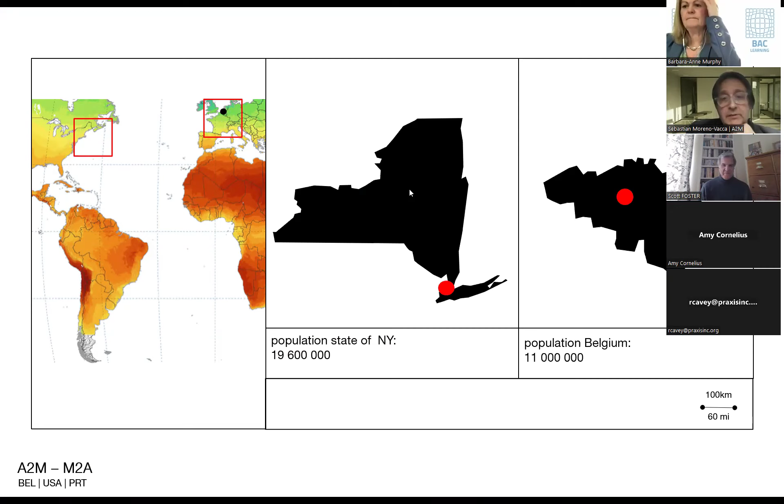We always locate where Belgium is, where I'm coming from, because it's almost like a joke as a country—it's so small. It's maybe half the size of New York State. Compared to New York City, we're like a region. Brussels is maybe a third of the size of the city of New York.

On top of that, we are very far from having nice, appealing, sexy skylines—very far. Wherever we go in the world, we see more beautiful skylines. The only thing is, when you take a picture of Brussels, wherever you go, you see that everywhere in the city, wherever you walk through, you're going to see passive house all over—in retrofit, in new builds, for all kinds of destinations and all kinds of size. That's the only thing we can say could be appealing.

And all that is because, as you heard from Barbara Ann, we adopted a law that came into effect in 2015, where passive house has been integrated into the official energy calculation methodology, and that impacts 100% of building permit demand.

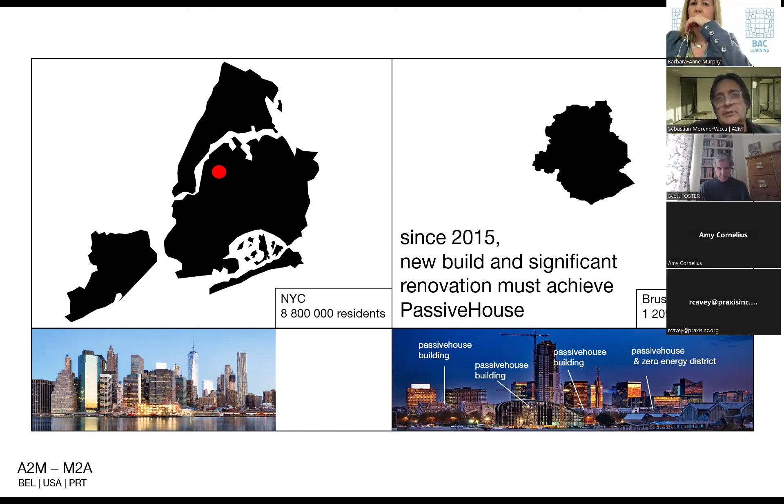It can be new build, in retrofits, all of it, 100%. So that was really a premiere. And it happens mainly when we look backward how it could be. It's mainly due to ignorance of the people who voted, hopefully. So I think this is one of the good help, the ignorance of people.

So the law was voted in actually in 2011. It was a parliament vote after 3 sessions. It's been voted, and it was voted at unanimity, 100%. And even the people in the opposition voted because their expert didn't understand really well what we were talking about.

That was fantastic. Nevertheless, after the law had been voted in 2011, 1 year after, we went to the sector together with the minister. She was a fantastic minister. She had in charge environment, etc. She was a very, very tough woman. After, we went to the real estate, to the builders association, to architects, engineers, but first she voted the law.

And what happened 1 year after the law had been voted? It was 2012, so 3 years before the law was supposed to come into effect. It was like it becomes crazy.

For a year, we had like almost panic. It was like all the sector says, 'Are you crazy?' We were in 2012. 'Are you crazy? It's going to be the bankruptcy of the region. No one is going to be ready for it.'

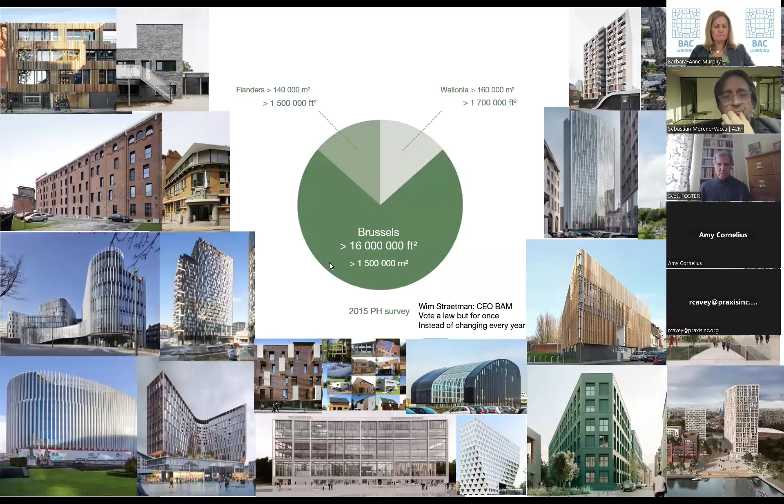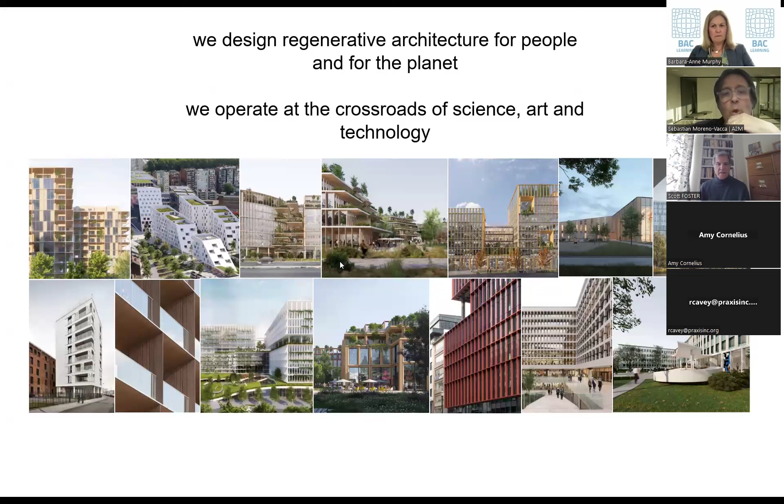So now, because the idea is to talk very briefly, where are we now in this situation? We're just architects - Barbara gave a fantastic introduction. We just do buildings, and a lot of trainings or conferences all over the world. We have 4 locations for the moment. Since we started in 2000, we did approximately 100 projects, 100% of them are passive house. You see here the sizes, some very small up to very large scale.

The question is, very quickly, passive house is now normal, it's in the code. Whatever you put on the market, new build or retrofit, there's nothing special anymore. It's just one more building.

So very quickly, we, and not only we but also our clients and developers, were asking what can we do next. A bit before the COVID crisis and the war crisis in Europe, we had a lack of wood, no more steel, aluminum or copper for 1.5 years. Before all this crisis, the idea was, can we go further?

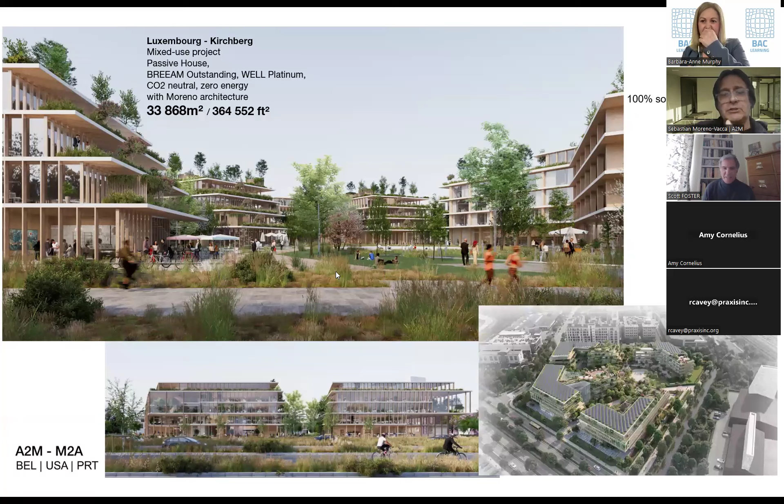Same in reuse, in circular design. Here, for example, is a building we just finished - everything was taken from recycled or reused materials, including the structure. That's a first in Europe, to use a stock of old steel from Holland. We used it to build, but you need a strong calculation methodology and so on. Again, it's retrofitting a former office building into housing - something we do now more and more.

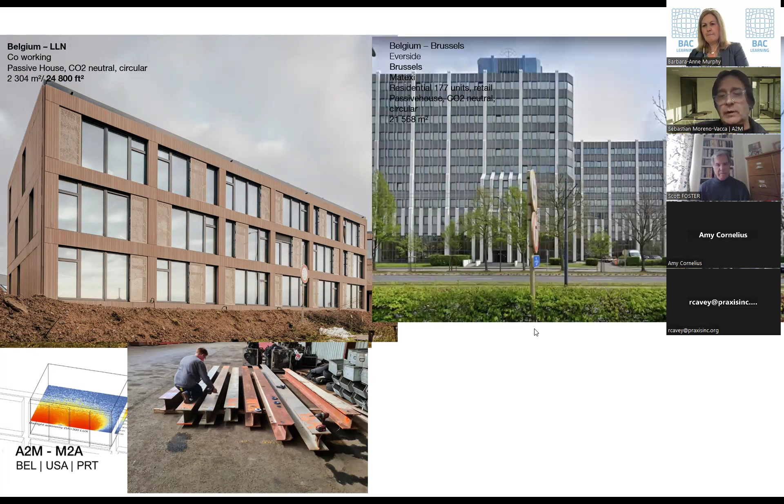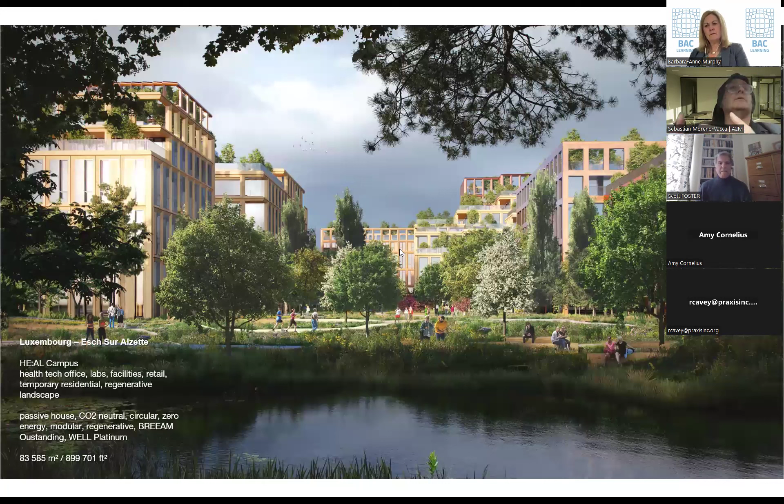So that's normal. This is another campus, in Luxembourg - a large brownfield site that's going to be about 80,000 square meters, a bit less than 1 million square feet, of office labs for startups, co-working and co-living spaces. That's the whole loop of elements we use, a continuous loop - the passive house calculator is somewhere in there, but it's a continuous loop from the very beginning. Afterward we deliver buildings using a lot of AI, parametric design, on-site control, etc.

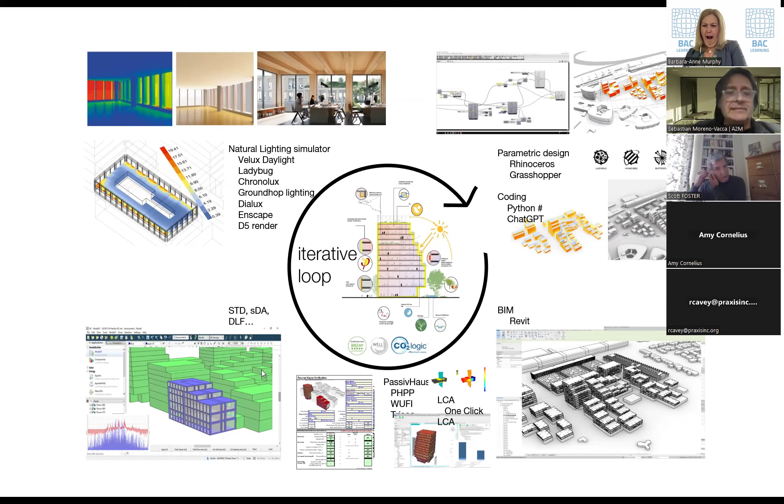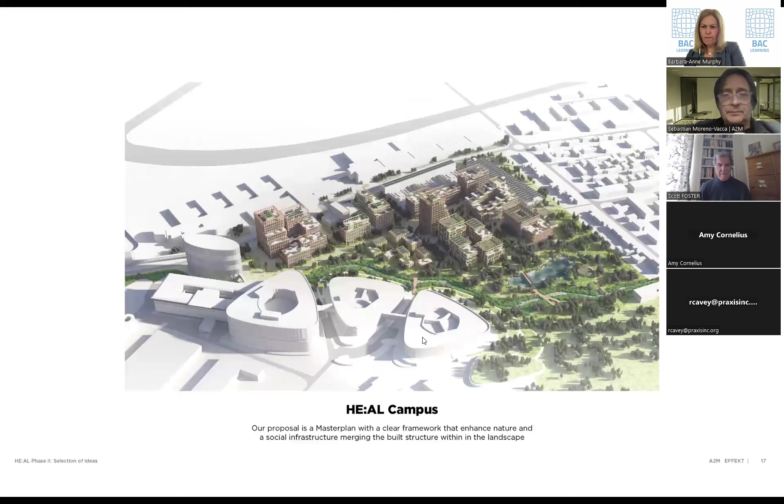That's something natural now. This is typically the narrative of this project, how it's going to be - this brownfield is going to turn into this, using parametric design. I'm going a bit faster now.

Another thing we use more and more is offsite construction. Everyone already knows this in passive house, but the idea is to go beyond - can we build to unbuild, with elements you can click and unclick, with no glue needed? Can we go that far?

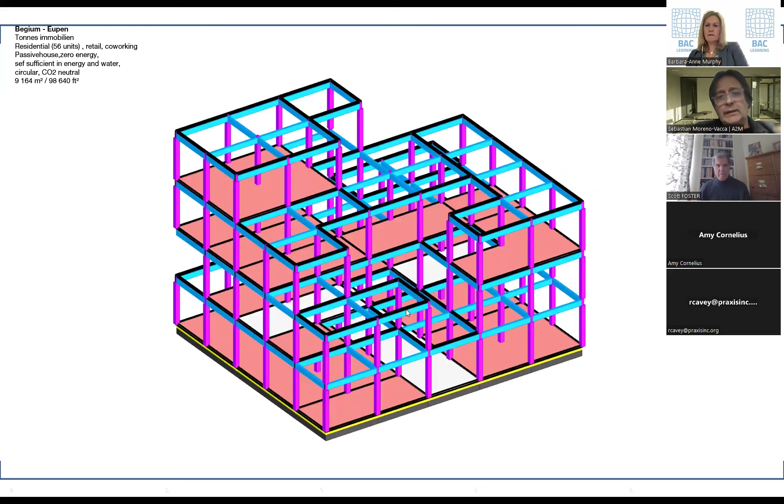So that's a project we're just starting now. The client wants the site to go beyond passive house - to be off-grid, not only in building assembly but also in energy and water. So you don't have to be connected anymore - over, ciao, finished. There's a retrofit component too, and the CO2 is going to be even negative because it's a clever system. One day I'll come back to explain it.

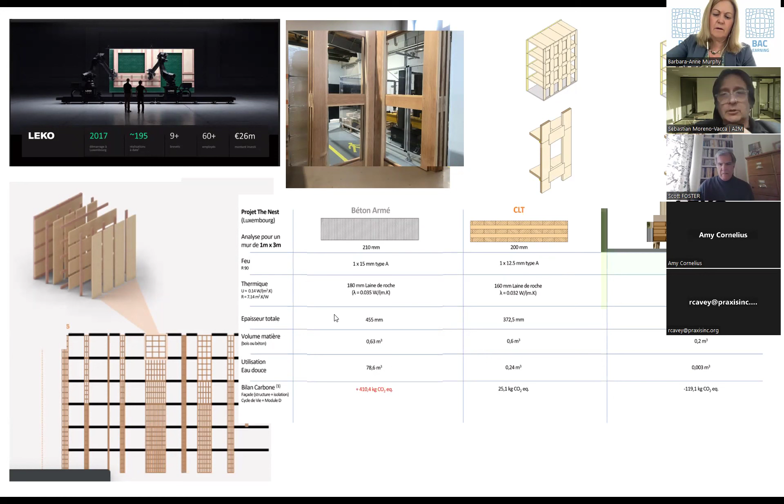So that's the large-scale retrofitting I was talking about, the one we drank so much coffee over. It's a bank, a building by SOM - Skidmore, Owings and Merrill - the famous, fantastic architecture firm. Back in the day it was led by Gordon Bunshaft from New York, built in 1964. So it's a landmark, a listed building.

So it was a competition for the ING Bank, how to retrofit it. We proposed to go beyond passive house, of course, BREEAM outstanding, platinum, etc. So it's already in construction now, in retrofitting.

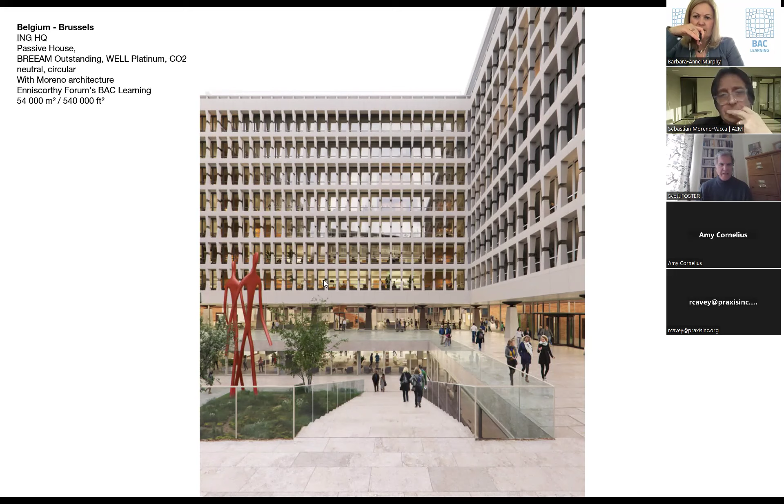So you see the same loop of all this software. It's almost over now, and of course it hits most of the goals. We have the 17 UN goals. We like to mix it with the one which is here on the bottom, which comes out of that famous

economic donut, if you remember, from Kate Raworth. She was one of the main people, she wrote a fantastic book on this, just in 2017, with the minimum social you have to fulfill and don't mortgage the boundaries. So it's kind of a rearrangement of the 17 goals.

This one is going to hit also the European taxonomy. Two of the first points are out. So when we see what are you good at, it's very easy to hit 10 to 11 goals of the 17 of the United Nations. So this is what we talk about.

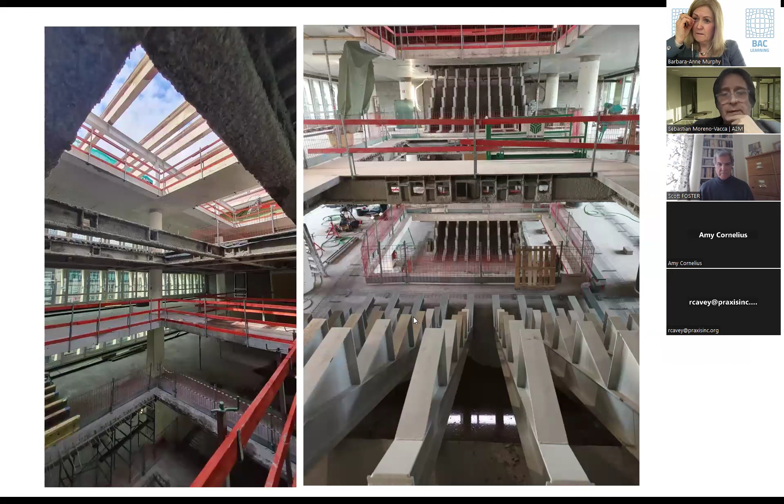Is this one? It's almost finished now. There are going to be like 3,000 people who are going to come back to the office now in this one. And at the end, the thing is, this has been, well, we are still in process.

It's almost over. And the construction cost, well, the retrofit cost, it's a bit less than business as usual. Actually, we're going to be at 65% compared to a stupid retrofit. And again, which is not good because we are paid on a percentage, so it's a catastrophe.

But savings compared to the former situation, it's a building from 1964. Savings, we are talking then more than 3 million euro a year. 3 million euro a year savings. This is what we talk about.

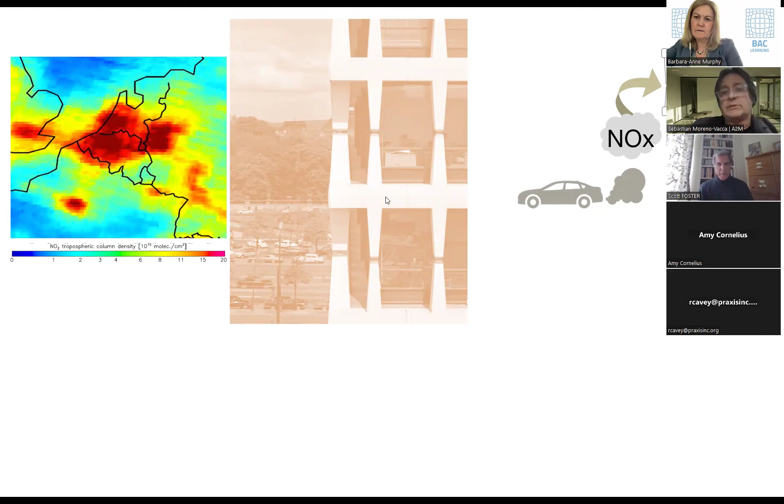Last but not least, we make some extra now because it's more than passive house. This special treatment on the facade, that treatment has a special effect. It's to clean the concrete that is attacked by the NOx, by the gas. So the idea, the gas emission from cars.

So with this one, it's also a photocatalyzer. It means that it's going to really clean the air. So as soon as you have a bit of sun and you have this NOx emission, which we are here, you see, but London, Paris, Amsterdam, we are all in the same situation.

We are in the smog. It's the same in New York. We have the same, or in London. And we are here, so it's the worst zone all over Belgium. So with this product on the facade, it's going to clean the air.

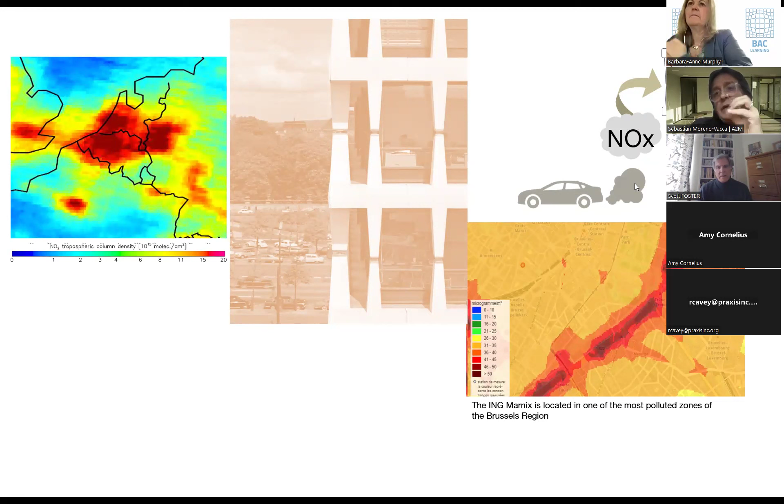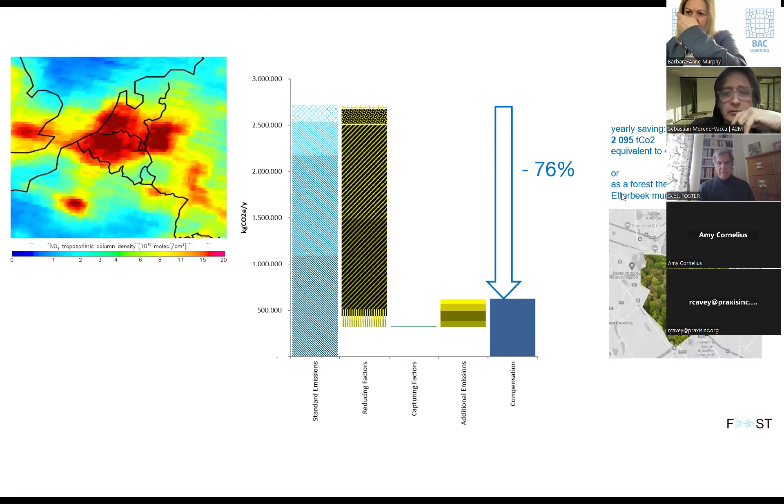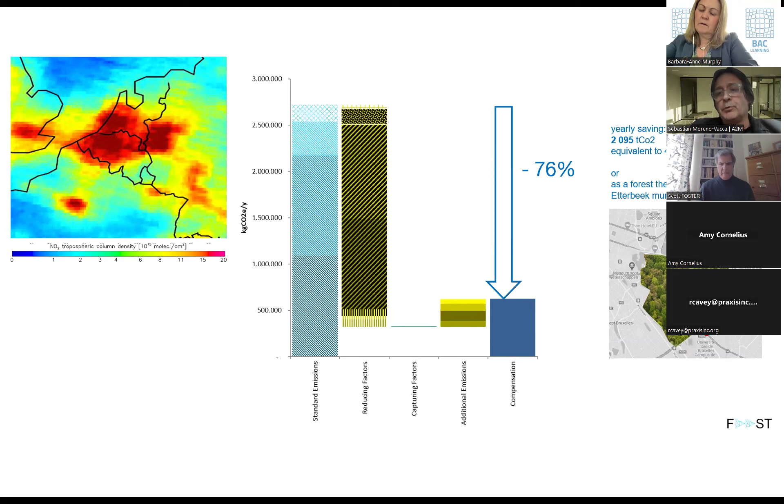And doing that, plus the fact that it's passive house, a bit more, etc., the CO2 savings is going to be more than 75%. And because of the size of the building, that's as much as a forest, the size of 419 hectares, or a forest the size of a municipality per year. So this is what we are talking about, savings in CO2 with one building.

So this is when we talk about regenerative design. So I'm almost over. So the question is, of course, is it too soon to know, or is it too late?

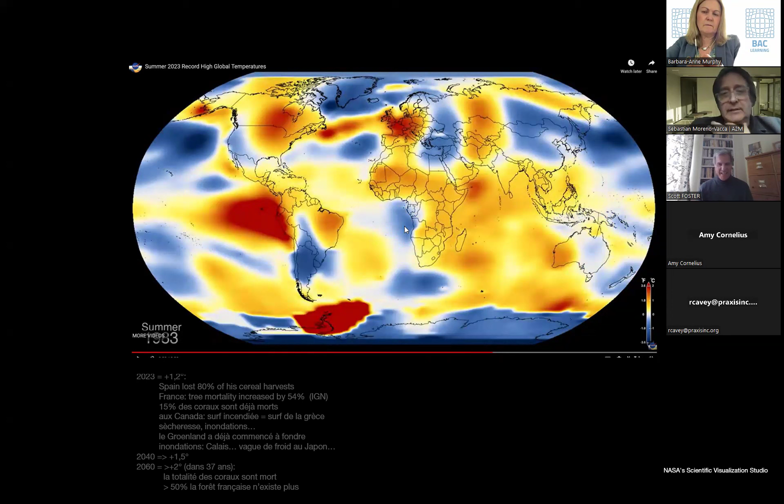So that's a picture I showed to the students at university. That's a map taken from NASA when I was born. So I'm very old, born in 1953. It was the summer of 1953, when I was 22 years old, the year of the students nowadays, and last year. So it's going to be worse and worse.

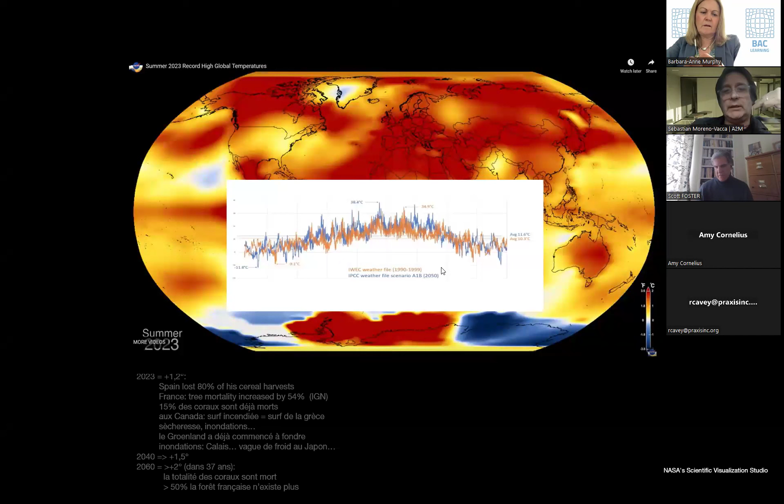That's another graph we show because we did a Western Europe survey of the climate. And we see that 2 years ago we achieved the weather that was foreseen for the worst case scenario of 2050. We had this weather 2 years ago, so it's really like, so when we say it's a climate crisis, it means

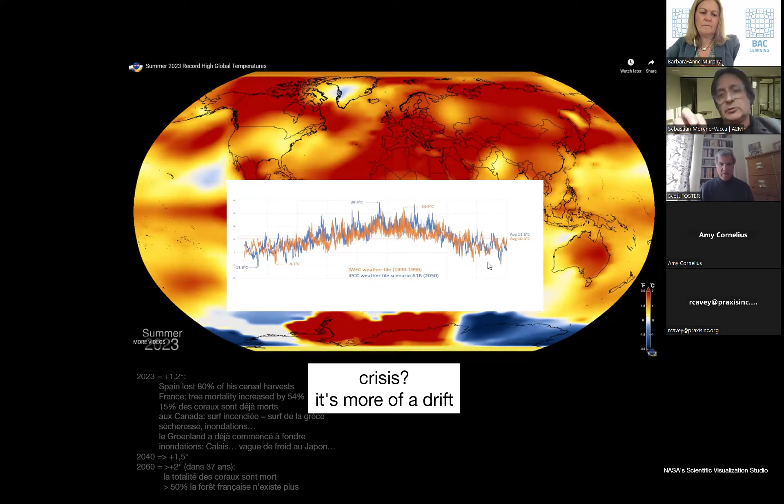that one day it's going to be solved, but it is not. It's never going to be solved. It's over. It's more of a drift that we should talk about. Normal is not going to be anymore. There's no way. So we just have to learn to live with it.

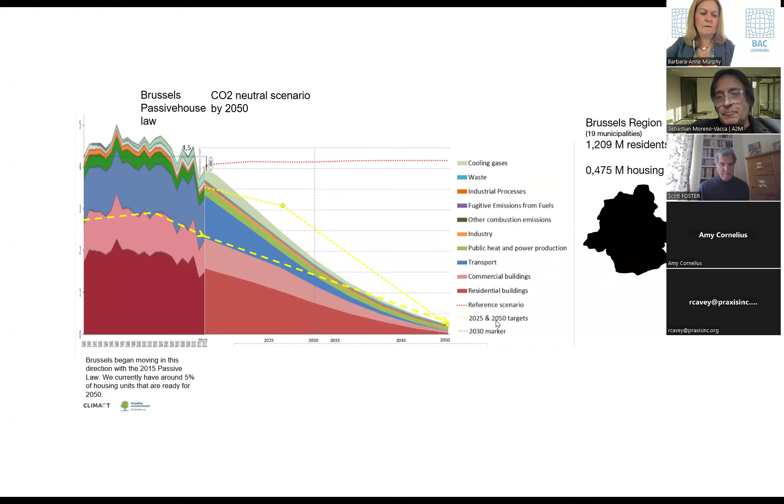So when we say with that passive house law, it's fantastic because the region of Brussels launched that huge program. Of course, we have a drop in CO2 emission. But if you want to achieve CO2 neutrality, which we have to achieve by 2050, even if we already have that passive house law, we should retrofit two dwellings per hour, non-stop from now until 2050. We are far from that. If I'm in Paris, it's worse.

We should retrofit non-stop 24 dwellings per hour to passive house, non-stop from now to 2050. London, 15, and actually in New York, it's not 25, it's a mistake, it's 30. So you see, we are far from that, very, very far. So when we all talk about 2050 neutrality, we communicate the same, but we know it's no way. Doesn't mean we don't have to target it. That's all the European countries' CO2 emissions. There's no way we're going to achieve that. If we want to achieve CO2 neutrality, we should reduce global CO2 emissions by a minimum of 5% each year, non-stop until 2050, all over the world.

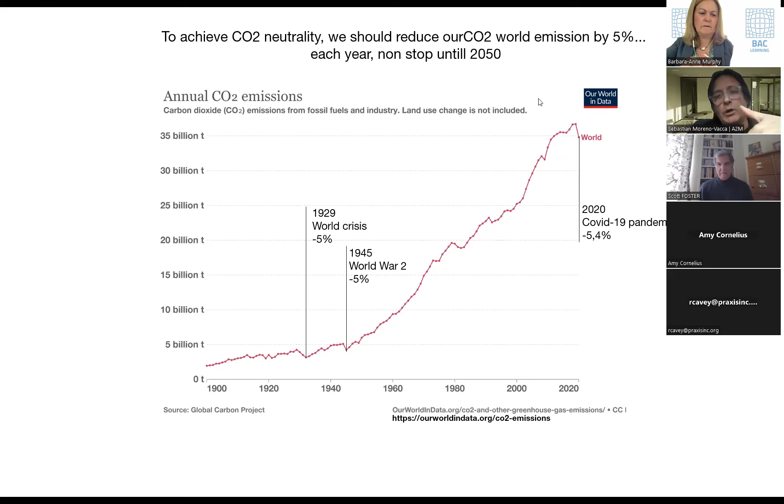Today it's even worse. Last year, the communication here explained that maybe we're going to have to target not 1.5 degrees, but maybe 2, maybe 2.9. So this is a quote from Confucius.

He said there are 3 methodologies to learn wisdom. One is to reflect, to be reflective, which is very noble. The second is to imitate, which is of course the easy one. And the other is by experience, and of course it's going to be bitter. He said it's clear that if you cannot achieve the target we are in, stop changing the target. Just readjust or try to manage the intermediate actions or steps to reach it.

So this is where we are now, because we know we're not going to do it. So we're more in the mood—this is why we go towards, very much beyond passive house, to regenerative design, because we all fail. So we should try to succeed in how to mitigate it. That's the famous boundaries that we are over. It's done. So when I say 'end with a small positive impact,' Isho already knows.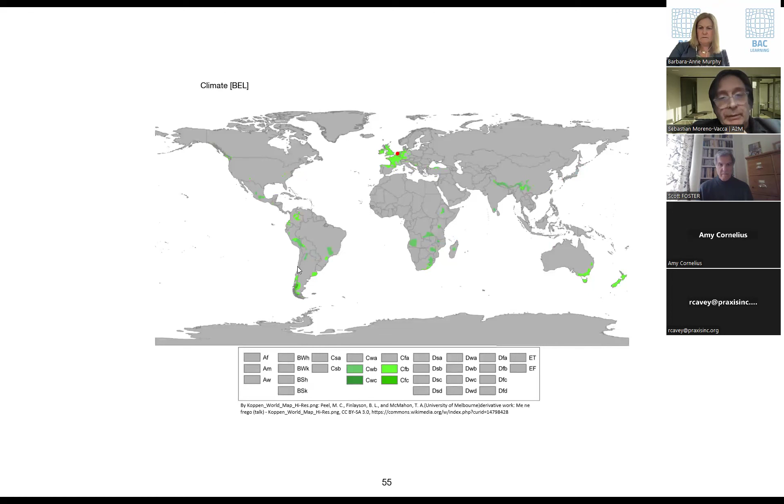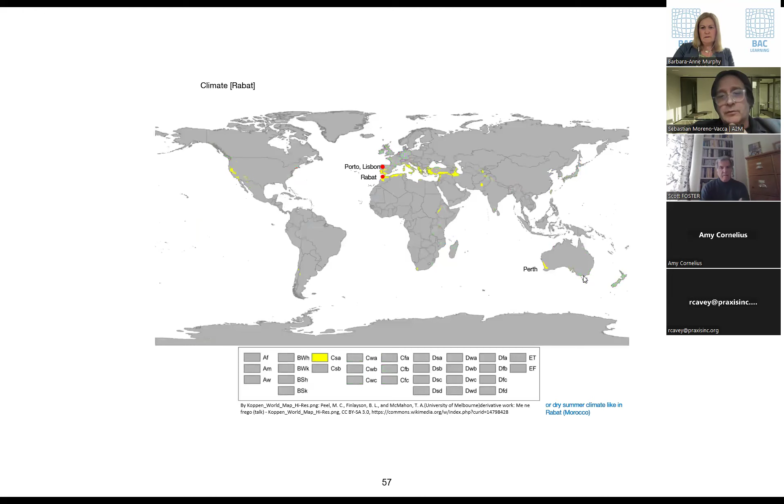If you take the Köppen climate map, if you do solutions of the kind used in Western Europe, that could work even in South Australia, in Vancouver, in Seattle, in parts of Chile or Peru—same climate, exact same climate, same solution. That's a project we're doing with Enriquez in Vancouver. Same solution, of course the material is going to be different, but the solutions are the same. If I take New York—of course it's different, but it's the same if I go to the Gold Coast in Australia, not far from Sydney. We have projects in Lebanon or in Rabat.

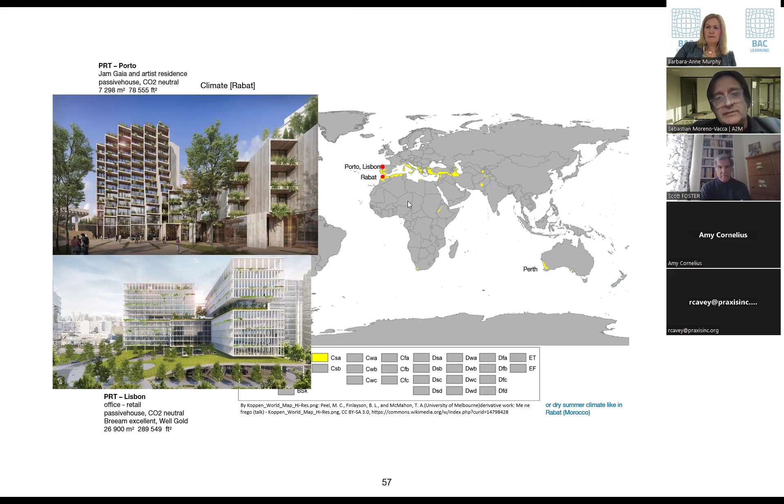This one is under construction. We also did a Belgian embassy there, and it's off-grid—more than passive house, it's unconnected. So I'm sorry, if you can do that, you can go to Perth, or other places with the same climate. Again, just by spreading the same solution, we're now studying a huge project in Arizona, not far from Phoenix—dry, hot desert. If you can do it there, in the middle of the desert, the Sahara, or the middle of Australia, same solution.

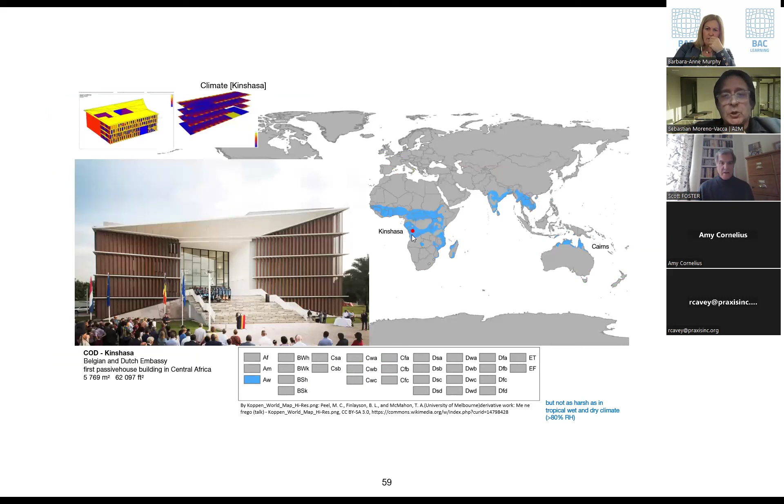We had only 20 to 30,000 visitors. Nothing. We did it again in 2009 and 2018 - some of you were there - and we had more than 2 million visitors. Of course, it was Times Square.

Thank you so much, Sebastian. That was just an extraordinary presentation - I can see the applause coming from everybody. Thank you very much for that. I don't know how much time you've got before you have to run away, Sebastian. Do you have time for a question or two?

Or have we already lost you? Just a couple of minutes, because I've run a bit out of time. Okay, if anybody wants to ask a question, I'll call on you first - but since I don't see any hands coming up, I see Ken's got a question. So Ken, fire away.

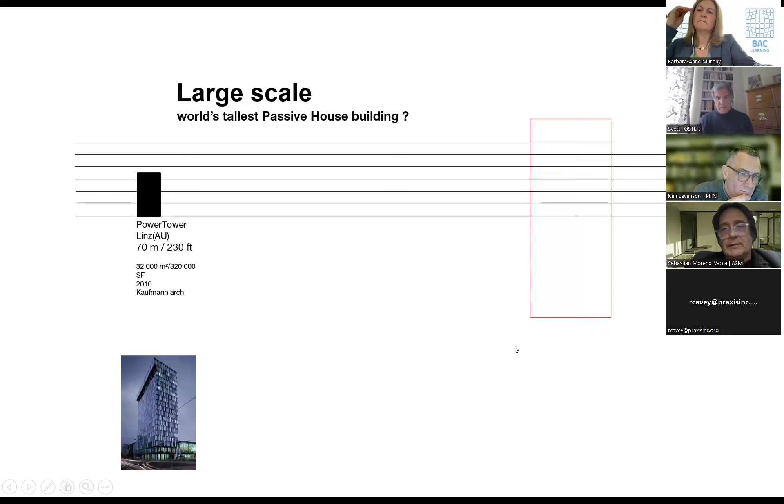Can we be self-sufficient? Looking at the 16 main oil providers in the world, they all peaked at maximum production in 2018, and we're just going down now. So whether we like it or not, in 10 or 15 years we're going to have almost half the oil that's there, and the same for gas. So you see, it's going to happen one way or another.